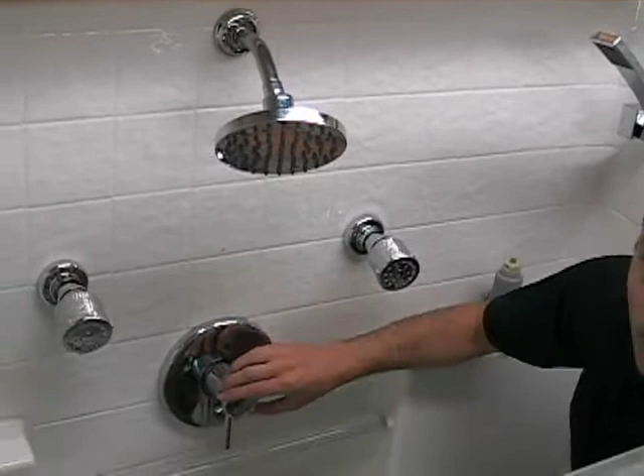So what I'm now going to do is activate the thermostatic shower system, where this is the volume control handle, this being the temperature dial. I'm going to set my temperature to the right mark, and there's a temperature indicator dial right here, and now I'm going to simply activate the volume, where you now have water coming out of the shower head.

By a simple rotation of the top of the spray face, I'm going to activate the volume control on the body spray. So as I rotate the spray face, I can actually control how little or how much I want coming out of the body spray. And that's the same for both of these body sprays here. And if I want to deactivate the body spray, I simply rotate this clockwise to turn this off.

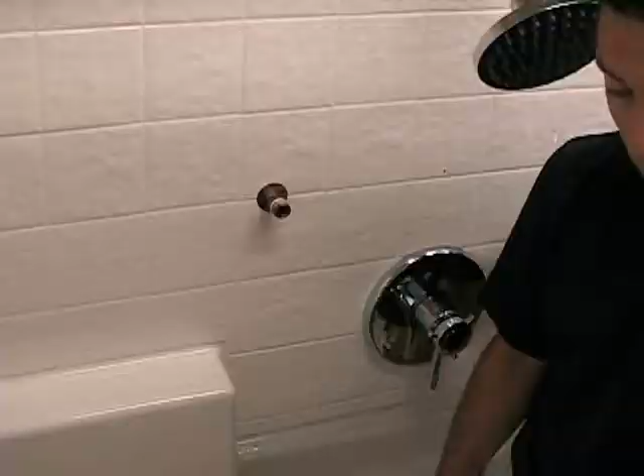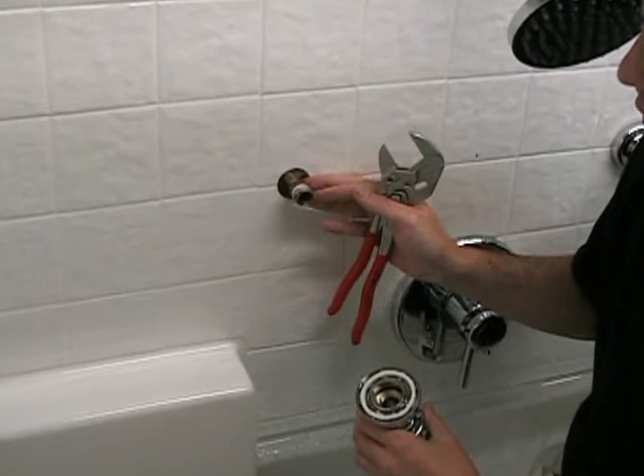Okay, now I'm going to walk you through the actual installation of the body spray. As you can see on here, there's female threads on the inside of the body spray, and that's actually going to connect to the inlets here, which are stub outs coming in from behind the wall. You're going to want to note that the minimum depth you want to have the pipes coming out of the wall is 7/8 of an inch, with a maximum of 1 7/8 inch. So that gives you a full inch of flexibility on your rough-in install.

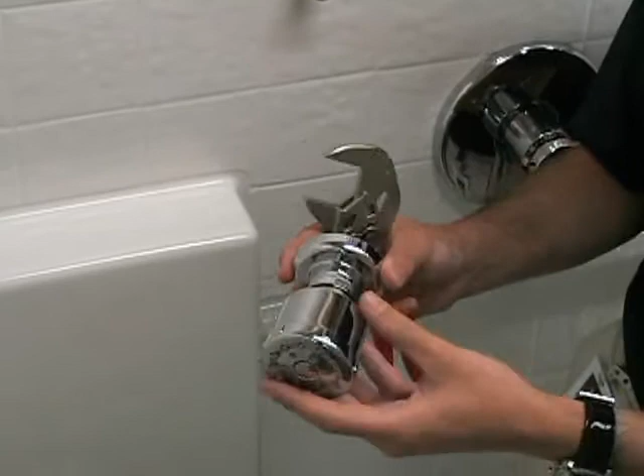So what I'm going to do now is show you the proper way to install this piece here. There's actually 3 different parts here of the body spray which we want to call out. First being the frame, second being the sleeve, and third being the base. So I'm going to hold this by the frame, dropping this right onto the actual stub, and notice that I'm going to rotate this on the sleeve.

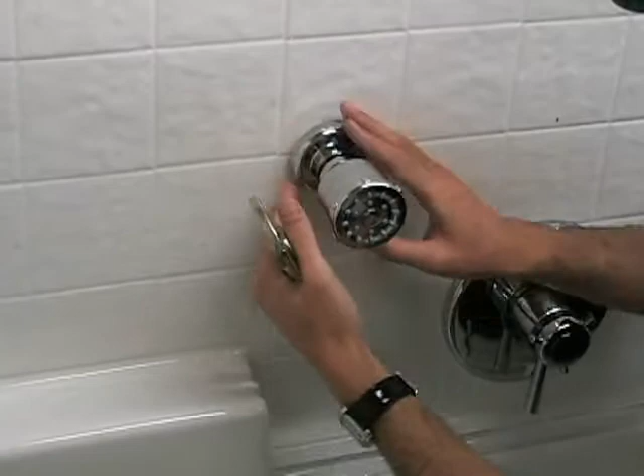So I'm going to hand tighten this just by simply rotating clockwise, and then I'm just going to take a wrench and just make sure that's nice and snug on there. Once I get that tightened down, by simply rotating the base clockwise, I'm going to make sure that this is flush with the finished wall surface. Now I have this properly installed.

You're going to note one other key feature of this product. We actually installed on here a brass ball joint to give you really great range on this product. Gives you about 16 degrees of rotation, so you could really have the perfect shower setup in your custom bathroom.

In addition to that, the ceramic discs that we pointed out are on the inside of this frame here. So the ceramic discs are going to make sure this product is going to last a lifetime. In addition, we put in a pressure compensating aerator insert to make sure that you have great flow performance regardless of PSI levels.

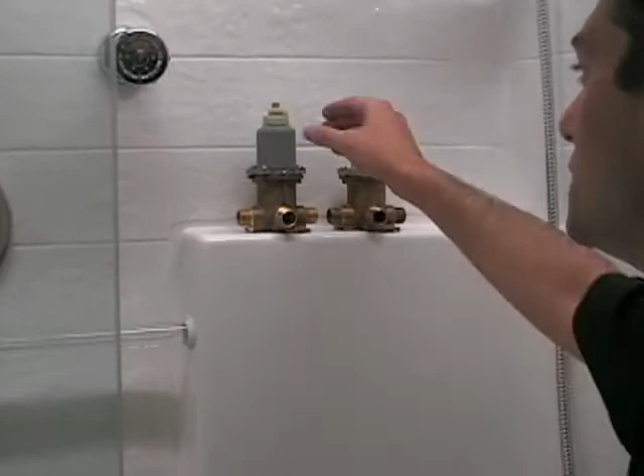Okay, I'm now going to show you the actual cartridge that drives the system that you just saw right there. This is the new TX8 half-inch thermostatic valve. As you can see, this valve actually fits in the same exact casting as our pressure balancer. So the beauty here is that you have one casting with 2 different cartridge options. The scale of this cartridge is slightly larger to enable you to get higher flow rates. And the diameter is slightly larger, which requires different trim options.

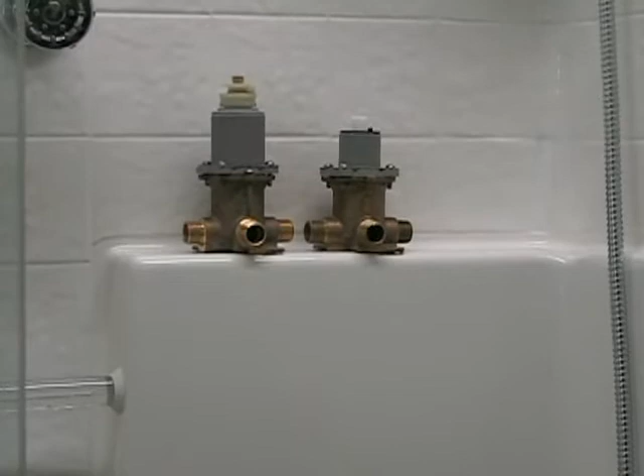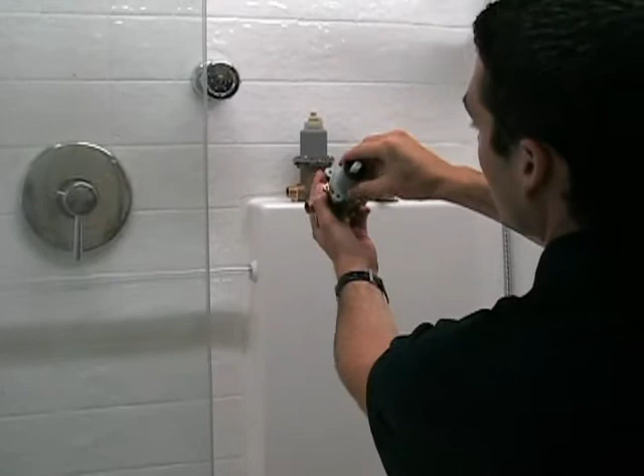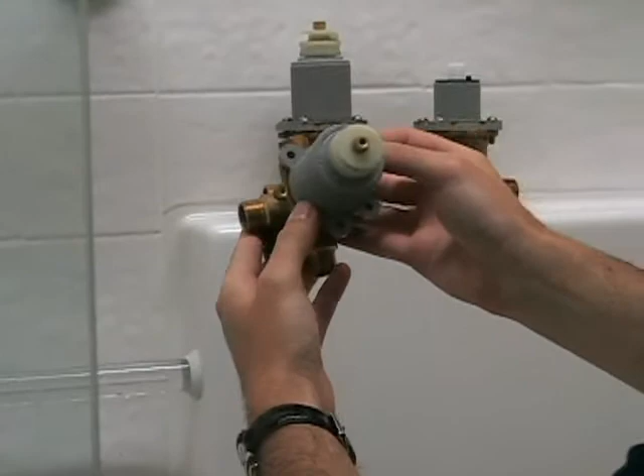What I'm now going to show you is a new configuration that we've just set up, which is the valve only option here. So this is the casting that you're seeing for these 2 cartridges. As you can see, if you have a system that currently has a pressure balancer valve inside the actual casting, all you simply need to do is to remove the trim, remove the screws in the back plate, lift out the cartridge, and take the new cartridge and insert that into the casting. So it's a very, very simple installation. You then add the back plate as well as the 2 screws, and you complete your installation.

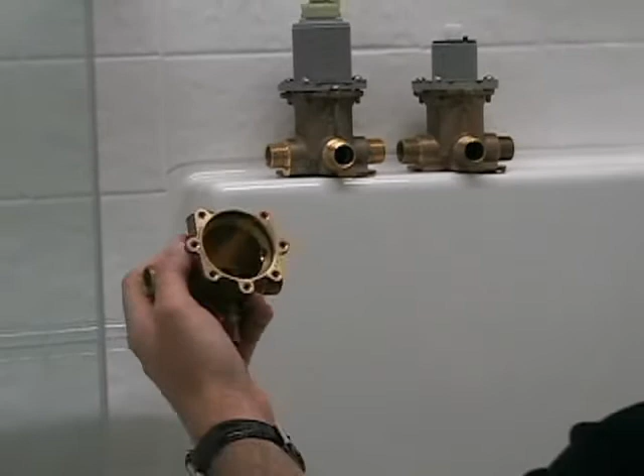Now, this valve only configuration, which is the VB8 SKUs, those are going to be actually coming with a new test plug, and this is a full test plug that you simply affix once you install the valve itself, complete the rough-in of the inlets and the outlets, and you can test the line pressure.

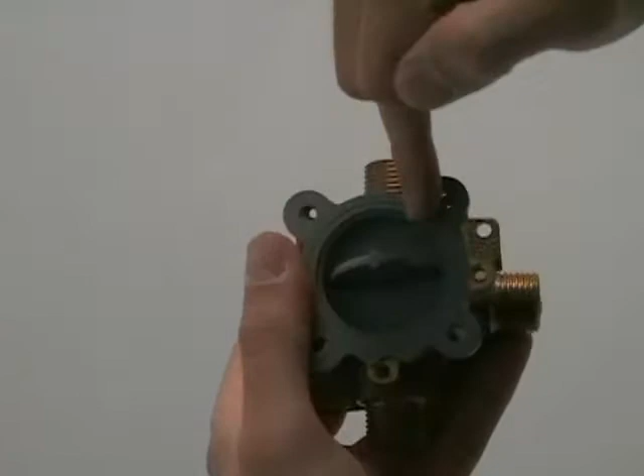Now, if needed, we actually set up a separate spare part which allows you to test the hot and the cold lines independently. And as you can see here, there's actually verbiage on the top of this test plug that says up to block, and it says specifically the hot inlet, which is on the top here, or if we rotate it 180 degrees, the cold inlet, allowing you to test each line independently.

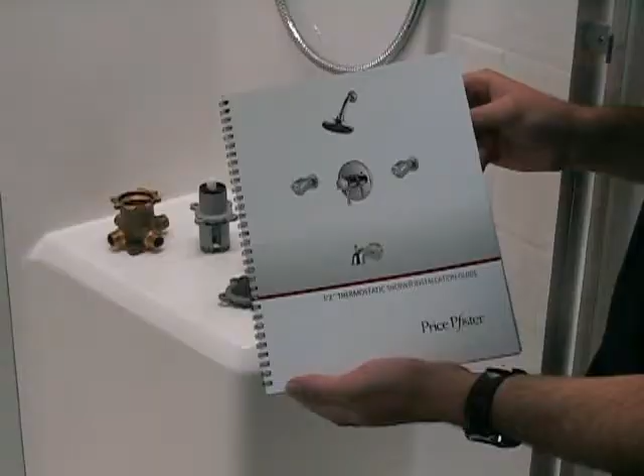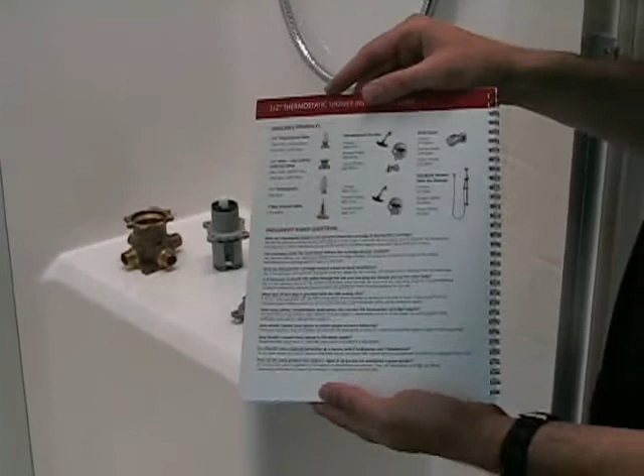And finally, we've created a 1/2-inch thermostatic shower installation guide. This installation guide comes complete with all the components that are available in the different types of configurations for setups. We have listed on here a number of frequently asked questions to help you along with the installation.

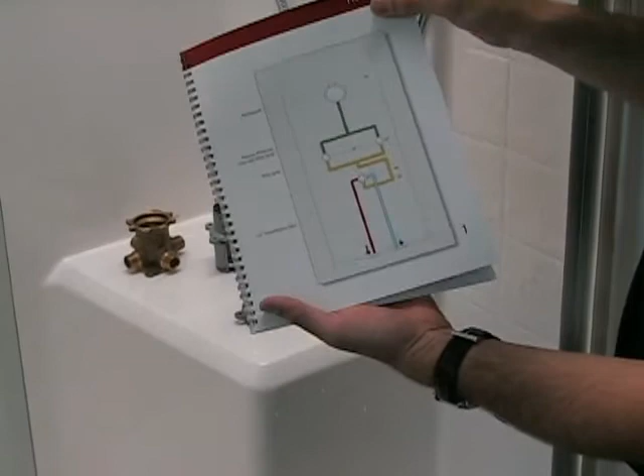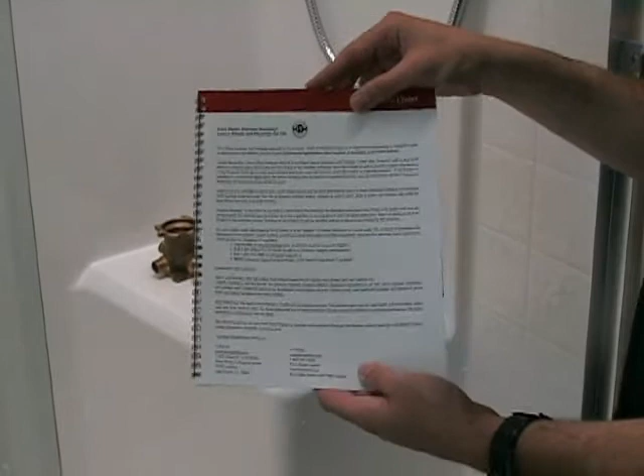And as always, Price Pfister puts our lifetime warranty on all the products that we create.